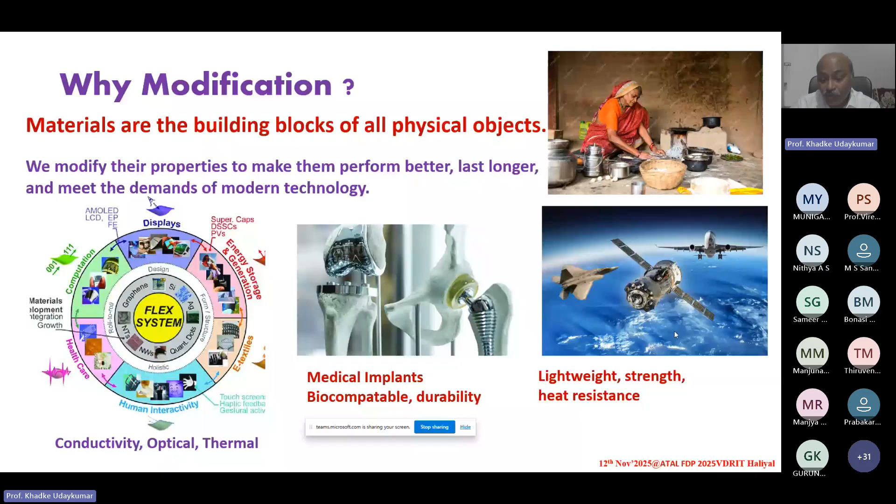So you need lightweight material, that modification is required. Modification in the sense, what kind of modification is to be done? One important aspect is, suppose if you are having a material in the form of bulk, you reduce that bulk material into nano size.

So one of the best modification ways is reducing the dimension of the material. There are different techniques to reduce the size of the material. One is considered the top-down approach, the other the bottom-up approach. Using these two techniques, you will be reducing the size of the material.

And believe it, when you reduce the size of the material, the properties are going to be changed drastically. One of the beautiful examples, let me tell you, by considering an example which has been called pizza paradox.

Let me narrate a story here. A king visited a hotel and asked the waiter to get one big size pizza. The waiter asked what size pizza he required. He simply said bring around a 12 centimeter pizza, that's a conventional number I'm just taking. The waiter went into the kitchen and saw there was no pizza of that size available. He came back to the king and said, 'Sir, I don't have the 12 centimeter pizza at present, it has been exhausted. If you want, I can give two 6 centimeter pizzas at the same rate.'

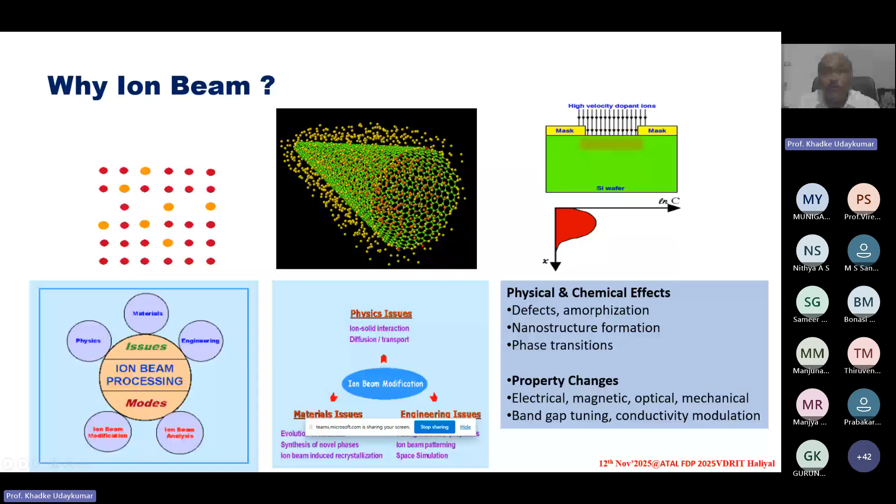Well, ion beam technology in the sense, as a part of physics, what we can understand - depending on the energy and the type of the ions, let me take down a very basic example here. You might be knowing the nuclear radiations, that is alpha particle, beta particle, and gamma particle.

Now, probably I can take a small gap in order to understand whether all the audience are attentive or not. Otherwise it becomes completely a one-way show - I'm just explaining it, whether the people are receiving it at the other end or not. Let me just check down. Receiving, sir. Receiving, sir. Good. Yes, sir, there are 52 participants, sir. Thank you, going on sir. Please sir.

Okay, yes. So now you know that when you are having a gamma particle, penetration power is very, very high. It can penetrate any thick material - it's a property of the material.

Now, the moment when you take down beta particles, to a certain extent it can also penetrate into the material, but the depth of penetration compared to the gamma will be very, very less. It is considered to be a charged particle. So because of the charged particle, there will be a hindrance in the material, and suddenly the beta particles will be stopped in the material. The range will not be that maximum as compared to the gamma particle.

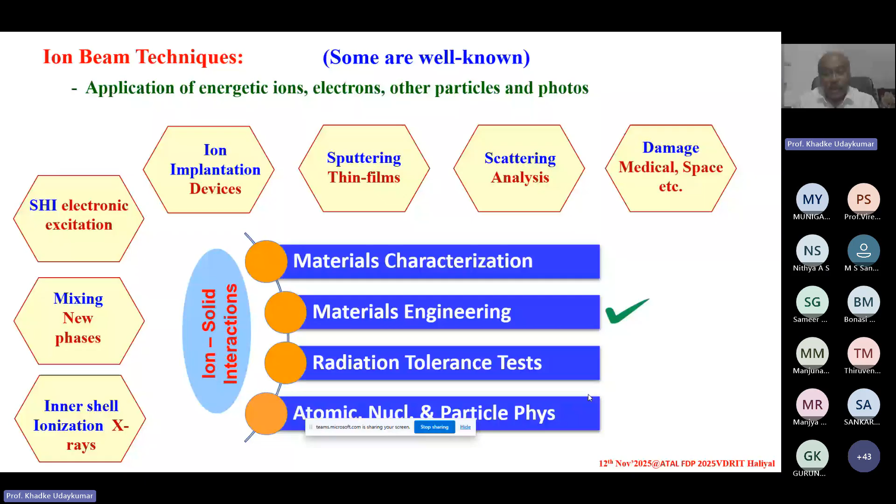Hope you all understood about the importance of ion beam. Well, what happens when an energetic ion hits a material? Obviously it loses energy. Who will take this energy?

As I mentioned, the moment an external ion hits the material or matter, it loses energy. Being a physics person, you should account for who has taken that energy - either it will be taken by the atomic nucleus, the whole atom, or it will be taken as electron energy. Who decides what share of the energy has to be taken?

Obviously, the cross-section area done by the ion when it hits the material. If the cross-section is more, more energy will be transferred. Atomic displacement will take place - direct damage. When atoms are displaced, direct damage takes place, or electronic excitation will take place, as I mentioned in the earlier slide. This slide tells us what kind of mechanism will be taking place.

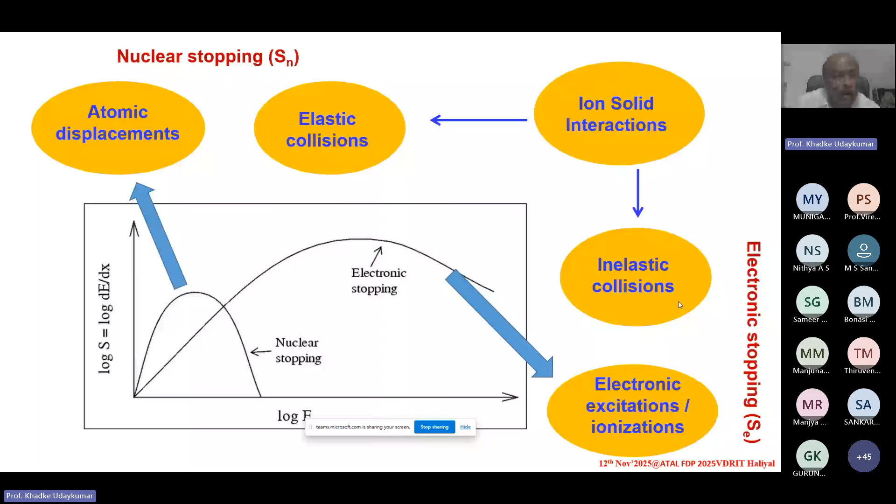Similar to X-rays - X-rays have a limitation because of their wavelength value, but this ion will have a smaller wavelength value. So more precisely, it tells about what type of atoms or what types of unit cells are arranged on the surface of the material. Or else, if the energy is more, it can go to the inner side.

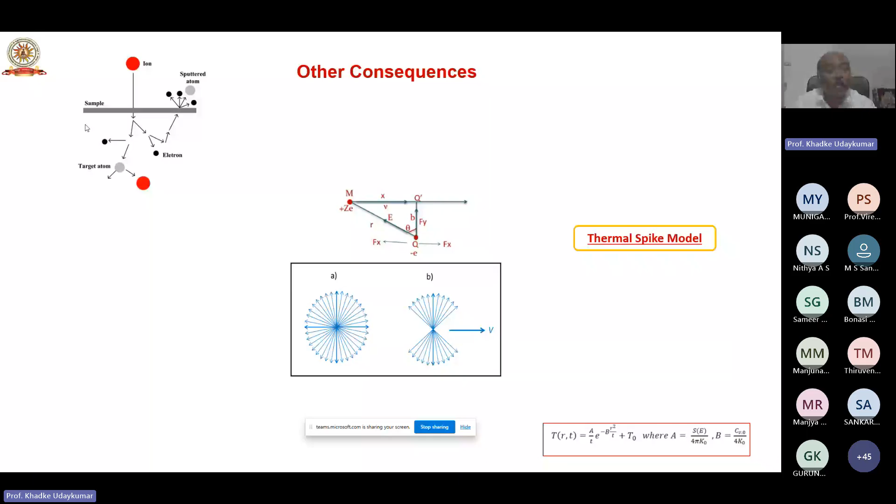So these electrons may interact with other electrons, creating secondary electrons called delta electrons. This kind of mechanism takes place inside the material, and this entire mechanism, in fact, we call it Coulombic explosion. The Coulombic explosion model tells us how ions, after penetrating inner depth apart from the surface, cause energy and structural modification inside the material, and that modification is what we call Coulombic explosion.

Other than that, as I mentioned, you will also be having delta electrons, which are most of the time considered secondary electrons. These secondary electrons, moving in their path, have a large number of collisions with lattice points and lose kinetic energy. When these larger kinetic energy secondary electrons move in the interstitial path, they have a chance of hitting the lattice points, and the lattice receives this energy. After receiving the energy, you must account for where it is going, and you will see that the material starts getting heated up.

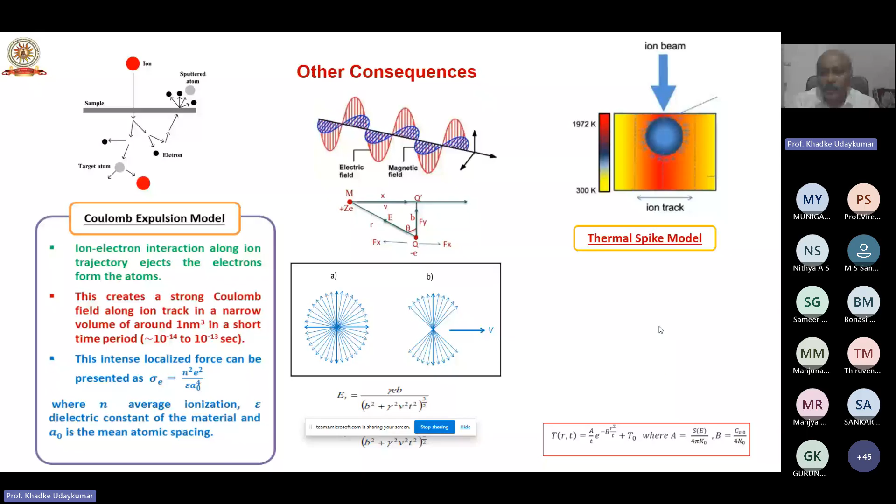These are purposely putting atoms or ions inside the material. When these ions are moving inside, there are no chances of having any external material getting deposited on it, like oxygen. All these experiments, in fact, have to be done in vacuum only, so you will not get any kind of oxygen deposited on the surface. Let me just skip this one in order to explain who has taken the energy.

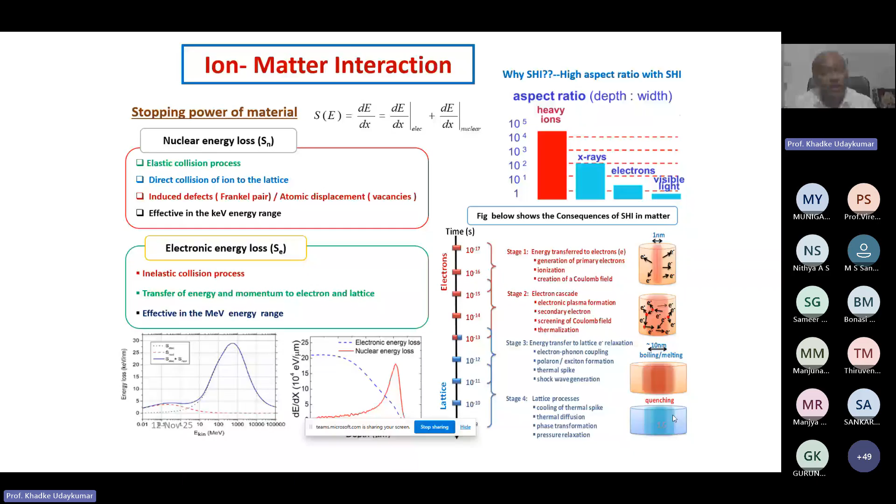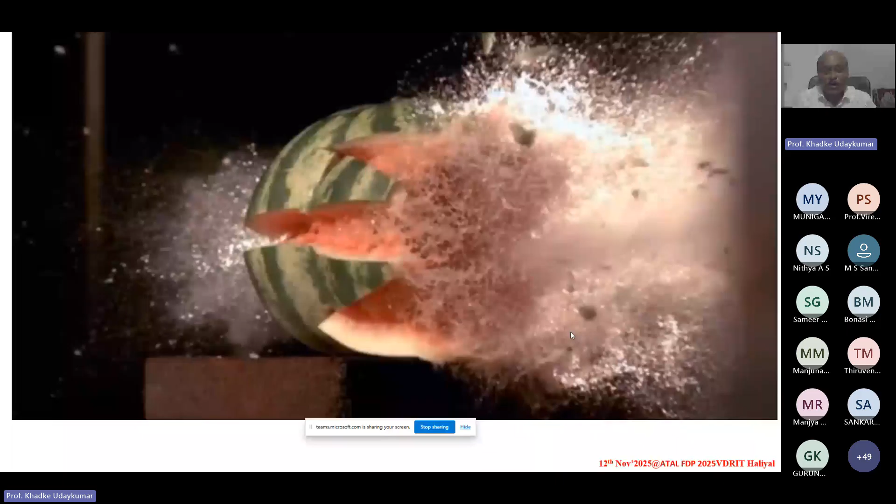Well, you can see, enjoy this. It was bombarded, and what kind of things happened? You can see that all the electrons from the inner side have come outside, whereas the surface of this watermelon remains intact. Somebody has rightly given the answer that it depends on the force, the impact, and what kind of collision takes place.

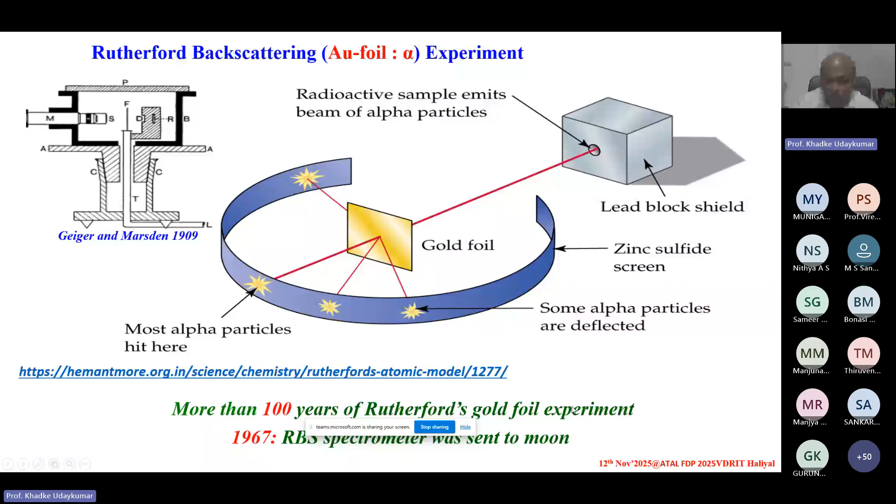So these are the classical diagrams and video clips I thought of sharing with you. Now, the Rutherford experiment — I don't think you need a complete explanation, which shows the discovery of the nucleus. We are now more than 100 years, close to 2067, closer to celebrating 100 years of this discovery. Well, these are the mechanisms by which you use ion beam in order to understand what type of material properties are there.

Well, let me explain this one. Now, having said this, there are many applications when I mention it—where do we get this ion? Now you have the freedom to use it.

Inter-University Accelerator Center uses a 15 unit double pelletron accelerator, where you can get huge amounts of energy depending on the type of ions used. If you use a proton beam, you can go up to a maximum of 50 MeV. If you use a gold beam, silicon beam, or any inert gas beam, you will get an energetic ion beam depending on that. Now, super LINAC, where energy can go up to giga electron volts, is also a facility developed at IUAC.

When you want very low energy, only for surface modification patterning, you can use the Institute of Physics, located at Bhubaneswar. That facility can be used where 3 megavolt tandem accelerator facilities are located.

Another option is IGCAR Kalpakkam. There you will have a 1.7 megavolt tandem accelerator, where you can get an ion beam, and according to the requirement, you can write a proposal. If the proposal is accepted by the scientific community, you will get a good chance to use that facility. IUAC accepts 5 types of beam time.

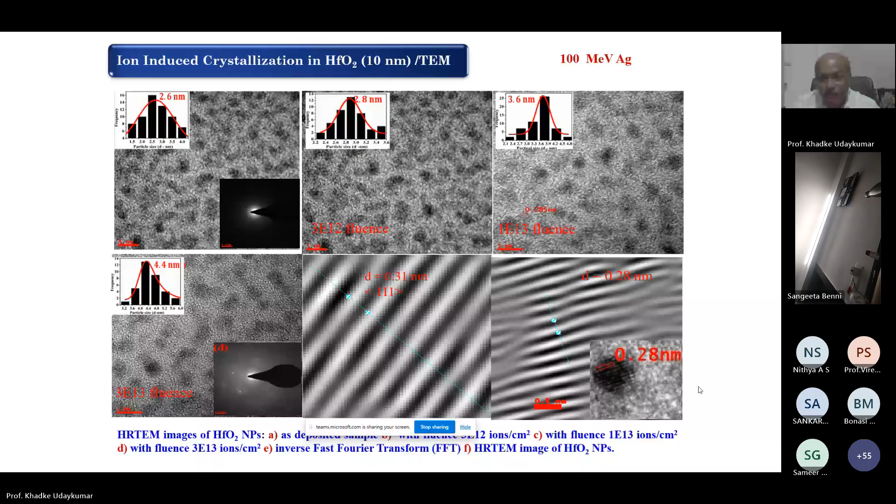Most of my work is modification of ferroelectric polymer using ion beam technology.

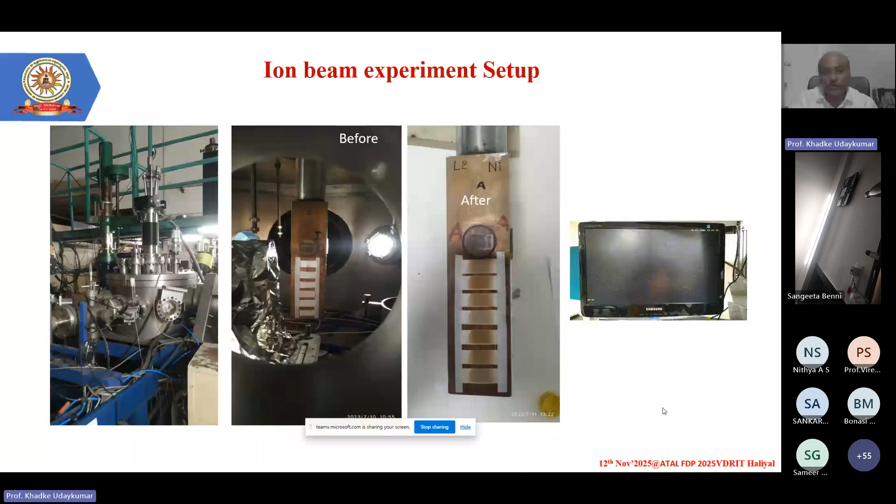Two important experimental proposals have been accepted by Inter-University Accelerator Center, where almost 3 PhD students have completed their work. One project is ion beam induced modification of ferroelectric polymer composites for EMI shielding, electromagnetic interference shielding.

Being a physics person, I know what the important mechanisms are required in order to have a proper shielding material. In a shielding material, electromagnetic waves, when hitting the surface, should either get reflected back, or the waves may penetrate to the inner side. The penetrated waves should get absorbed by the intermediate side. So what should be there so that absorption will take place? What should be there for reflection to happen?

Reflection will happen the moment the surface of this polymer is made up of essentially a conducting material. The absorption, or multiple reflection inside the material, leads again to a type of absorption only. So absorption is a phenomenon where two types of absorption will take place: direct absorption, or multiple reflection. For that, you need a material which has good dielectric constant.

As well as good magnetic property - in the sense, epsilon r and mu r should both be very, very high. Now, when you have a material whose dielectric constant is more, whose magnetic property is more, magnetic susceptibility is more, and conducting properties - suppose if you combine these properties in a single material, believe it, achieving shielding efficiency will be very, very excellent.

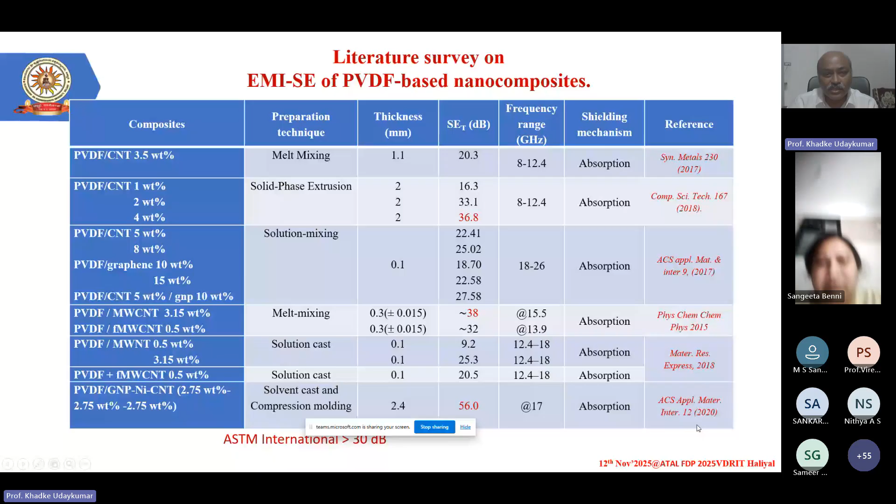I don't have to repeat the mechanism once again. When the fast ions pass through, it creates a thermal spike model which creates porosity in the material. The pore size is not equivalent throughout the medium - at the entry level, the pore size is smaller, and at the exit level, the pore size is larger, so it creates a cone-like shape. These cone-like shapes are very favorable for our experimental results.

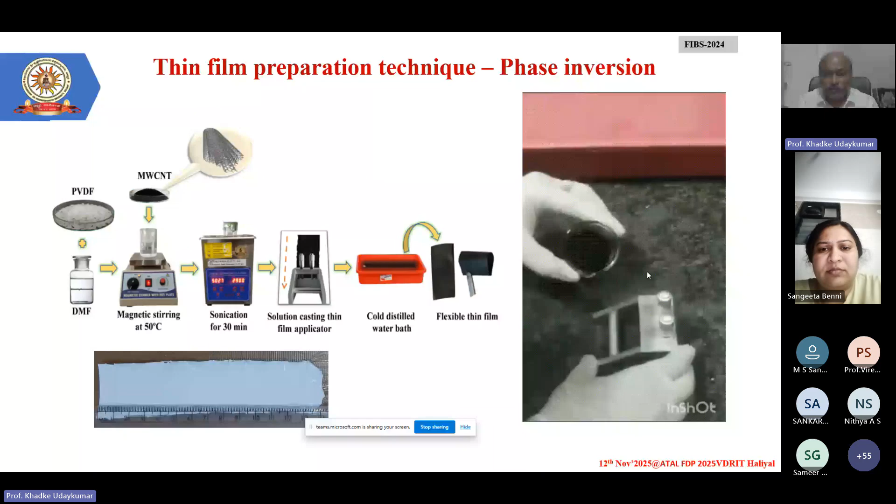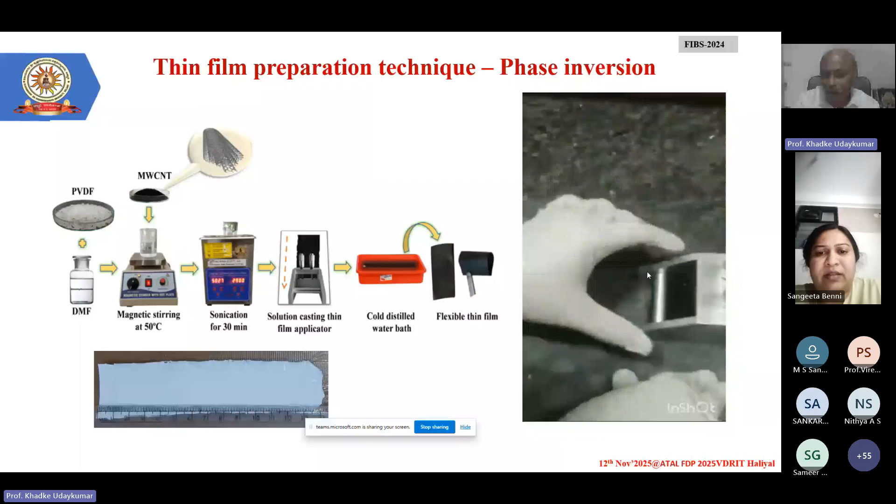Now, for the film, we have taken utmost care to have uniformity on the surface, and the density of the material is uniform. This is a technique developed in my lab - we are able to prepare thin films of the order of around 250 to 300 micron size, that too self-supporting. Some people say these are not thin films, these are thick films, but we can consider anything in terms of micron size as a thin film, and you can see how beautifully the films are coming out. Even the dimension, the area, is also very large.

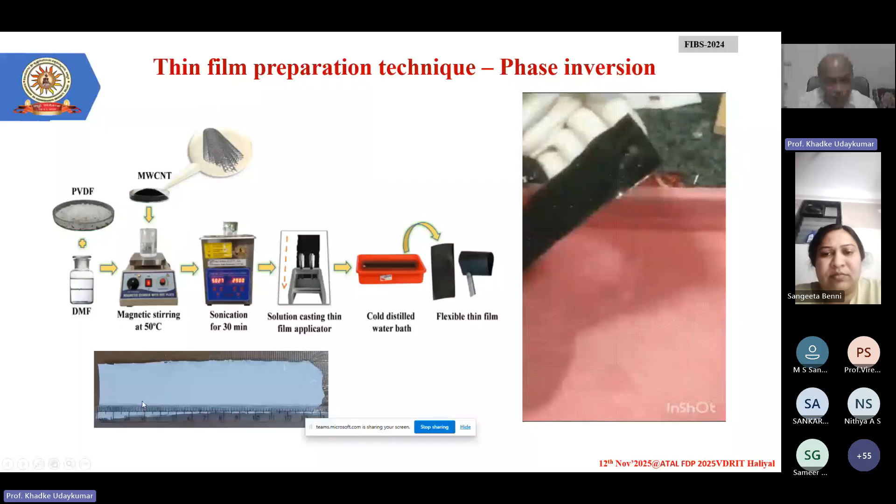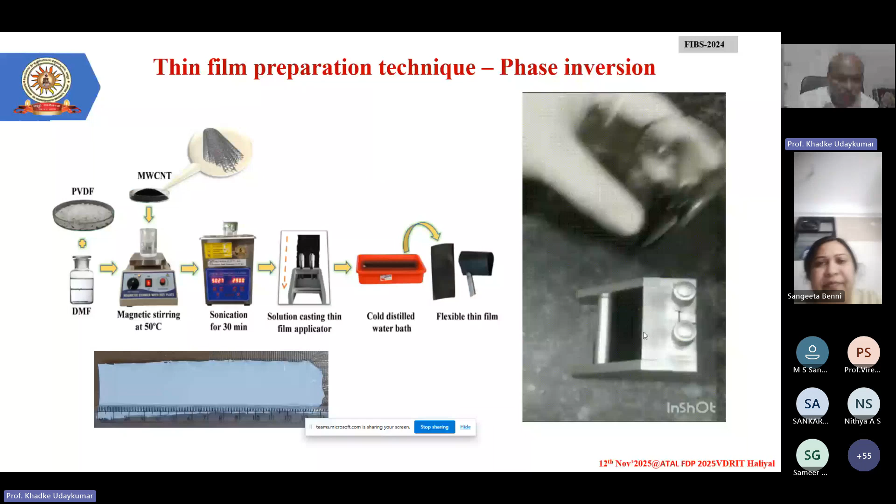So here in white color, this is pure PVDF. What you're seeing in this clip is the preparation of thin films of PVDF mixed with carbon nanotube - that's the reason the color is black, while white is the pure PVDF material. These are the films we used, and we treated them with ion beam. This is just to show that we have that facility.

These are the different types of beams we used: three beams total - 100 MeV oxygen beam, 80 MeV carbon beam. To get good conductivity in the PVDF material, we used the carbon beam. For good dielectric constant in the PVDF, we used the oxygen beam, and a nickel beam was used so we can tune the magnetic properties of the material - those things will be discussed here.

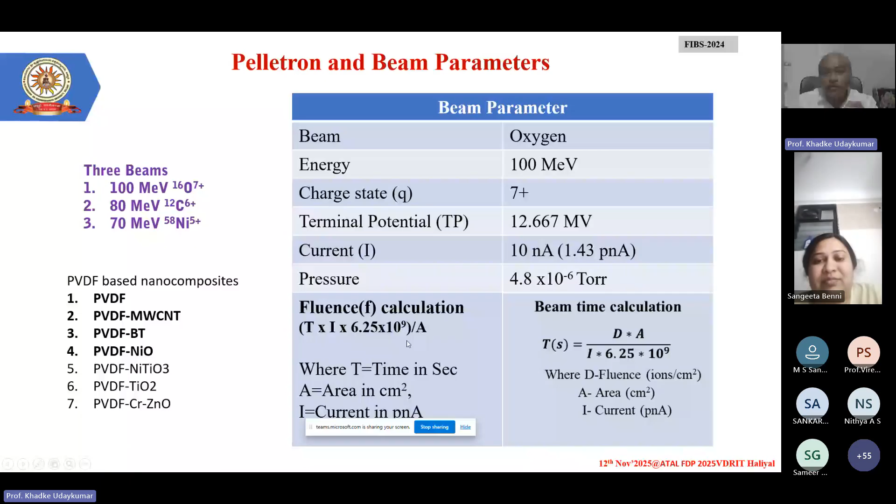Let me just put the values. What we observed is that the moment the beam hits the surface, suddenly bulging of the film takes place. Now what kind of bulging occurred - for pure PVDF, using 250 micron thickness, after bombardment with oxygen ion beam at a fluence of 10 to the power 11, it went from 250 to 310 micron. So almost a 20% increase in thickness has taken place.

Later it has settled. Continuously we are bombarding it with a different, higher fluence. Again it has decreased to 290 micron, and with further increase in fluence, it has settled back to 280, and later it has not changed. It has not come back to 250. This is just to show that after ion beam implantation, bulging of the film has taken place.

Now these are the microstructures. As I mentioned in the title, I'm explaining how the micro patterning and nano patterning has been done. Nano patterning I have already shown. Micro patterning is also called the columnar effect.

When the beam hits the surface and goes inward, it generates a surrounding temperature, and erosion takes place. Because of that erosion, you will see that a large number of porosities are created. This is the cross-section view of SEM which clearly shows how the micro patterning is created inside, meaning porosity has been created.

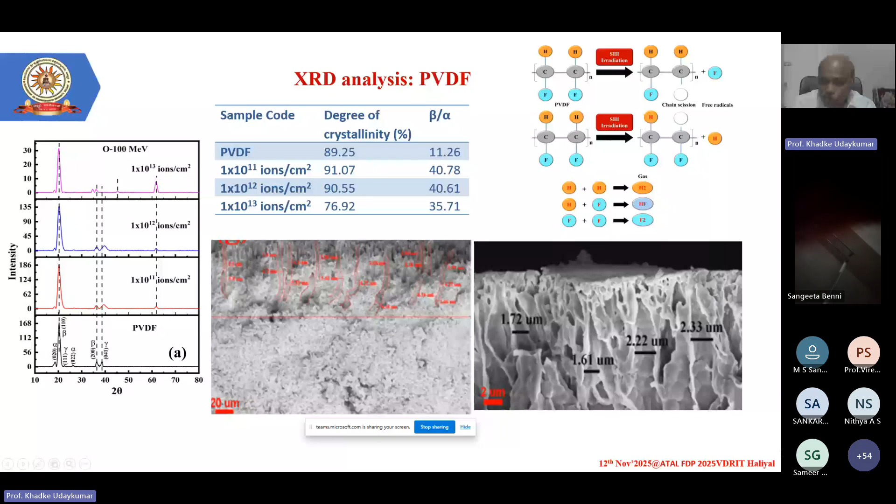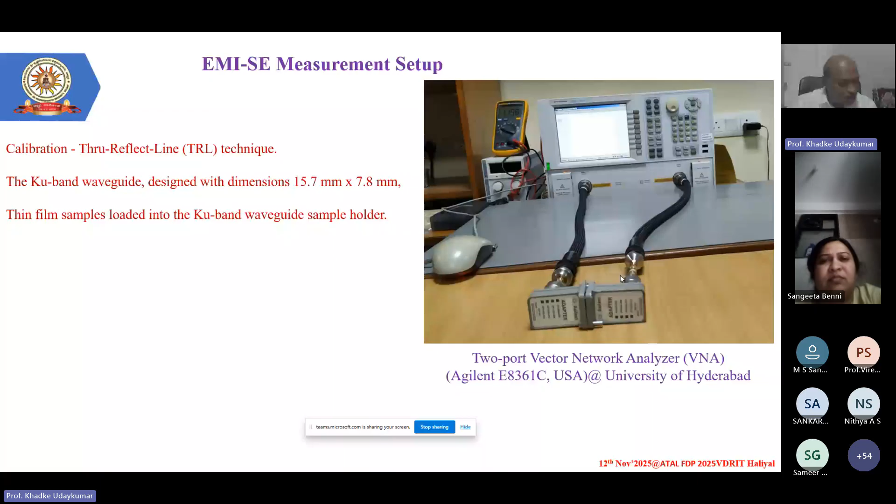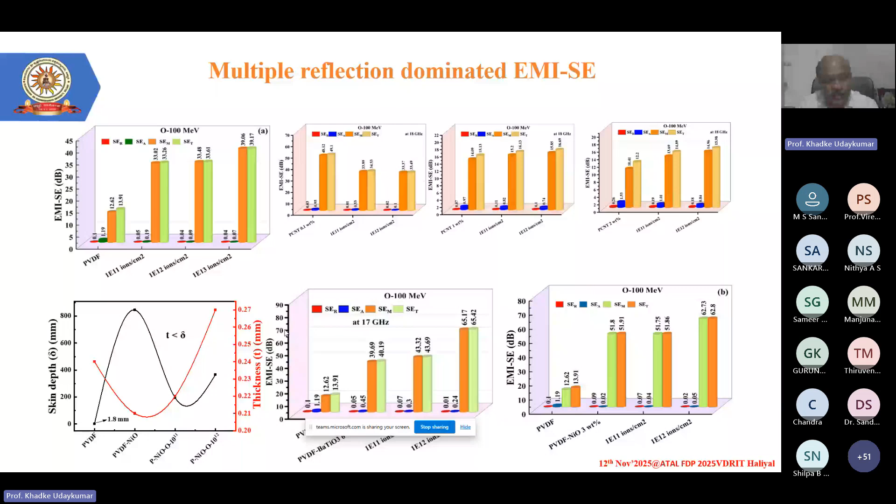Due to multiple reflection, the entire waves get deposited inside. We got the same thing, and that is the reason we reported the main mechanism is due to multiple internal reflection. That is what we have shown and published.

The second important application is about using the PVDF separator in a zinc air battery, and there also we could get results. Due to shortage of time, I cannot explain everything.

Porosity and all this mechanism are there, but let me directly go to the result.

Another important thing, I don't know whether it will work or not. A porosity is created. What is another conventional method to understand the porosity?

The electrolyte uptake is another important phenomenon to understand whether the separator is good or not. We saw that the electrolyte uptake is also coming in proper order.

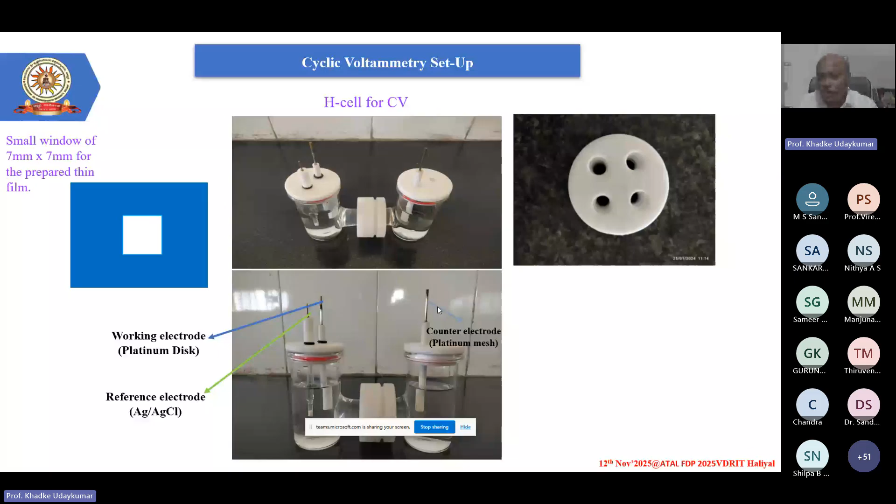These measurements have been done by us, and we used a very low cost experimental setup with very high precision value. That is an ExpEYES kit, which some people might know about, and using the ExpEYES kit, we developed our own CV setup. Even the cells, all those things have been prepared in my lab only.

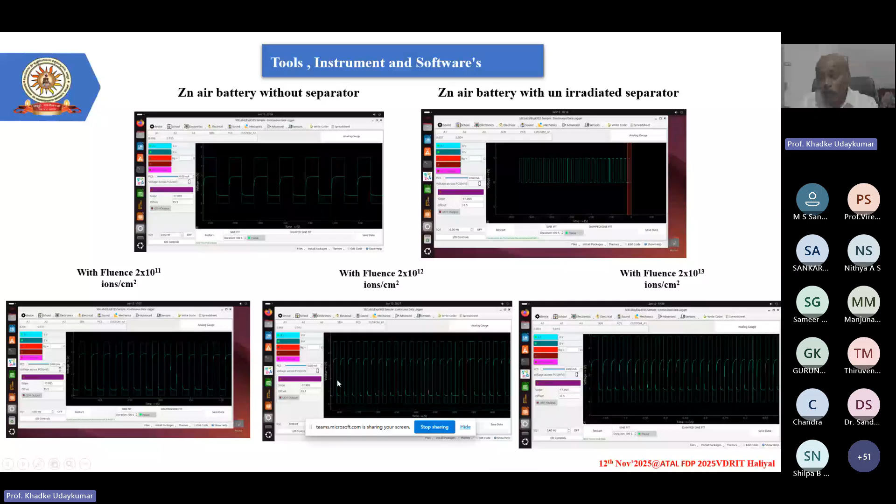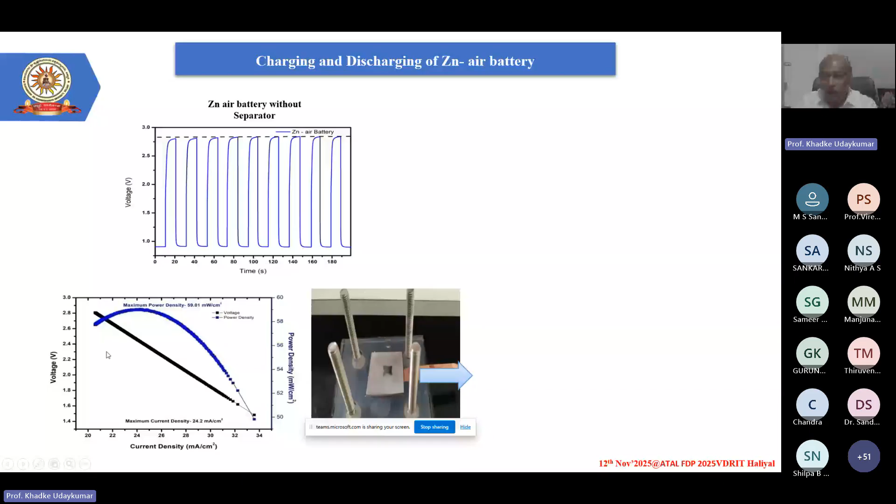Well, this is a zinc air battery without separator. You can see that without separator, you have power density as well as current density drawn in this graph. The moment when you put an unirradiated separator, there is no current flowing in it, and no kind of layer is prepared on the electrode.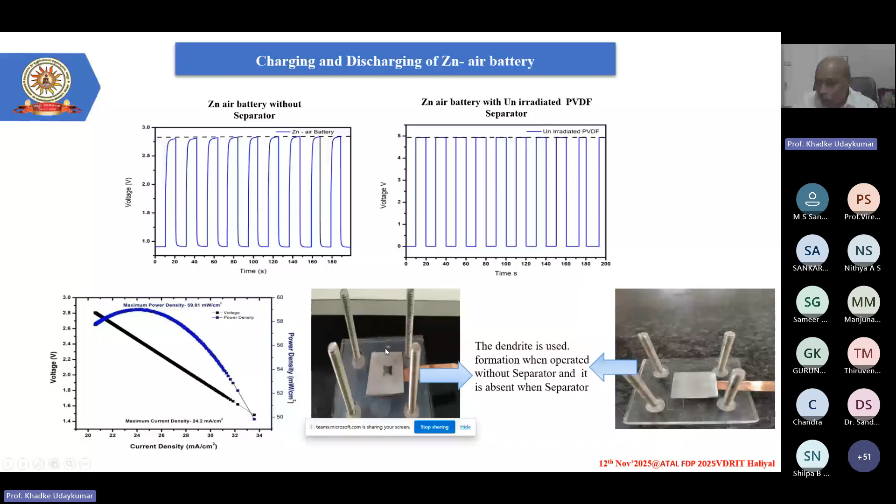This is an electrode, zinc electrode. Now you see that on this zinc electrode, a small kind of patch has been created when you're not using a separator. The moment when you use a separator, no kind of pattern has been created on the surface. It is completely neat, which means that dendrite has not formed.

So these show the variation of current density. A lot of work has been done by my student on how the current density varies across different cycles: first cycle, 50th cycle, 100th cycle, what is the current density and power density for the zinc air battery in each case. We saw that current density and power density drastically increased the moment irradiated PVDF was utilized. The maximum value we achieved is of the order of 59.91 milliwatts per centimeter square, power generated from our film.

And if you have cascaded, series-connected cells of this type, you will be able to generate a large amount of power from the battery and use it for a longer duration. These are GCD, galvanostatic charge-discharge mode measurements, where you can see the area is more, meaning more energy can be stored. That information can be understood from this one. Let us not go deeper into that.

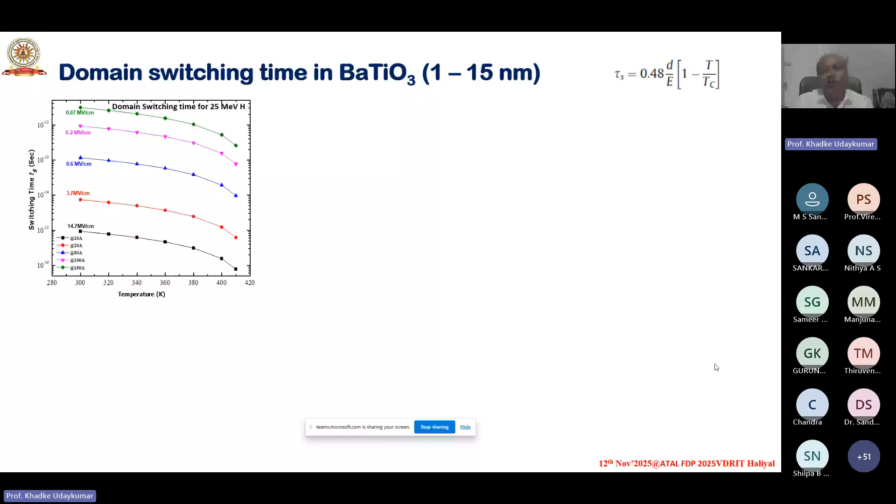Okay, all these are again another important experiment where we try to find out the electric field generated inside the material due to the passage of charged particles. So this is electrode-free domain rotation from the ion beam, where you can use these techniques in order to rewrite or retrieve electronic data from the material.

A lot of work that I don't want to explain at this moment of time, so I will skip this one.

Summary: the ion-matter interaction mechanism for modifying PVDF film is well understood till now, with energetic ion irradiation increasing crystallinity and creating controlled porosity as the new work we have put into the scientific community. This modified PVDF-based nanocomposite exhibits enhanced EMI SE, as we have shown.

We successfully demonstrated in a functional device that a zinc air battery with an irradiated PVDF separator showed excellent electrolyte uptake and increased power density. We did not purely take PVDF and study it; we made composites out of it and then irradiated or implanted it, so we could find out the synergetic effect of these two mechanisms leading to the higher properties we required.

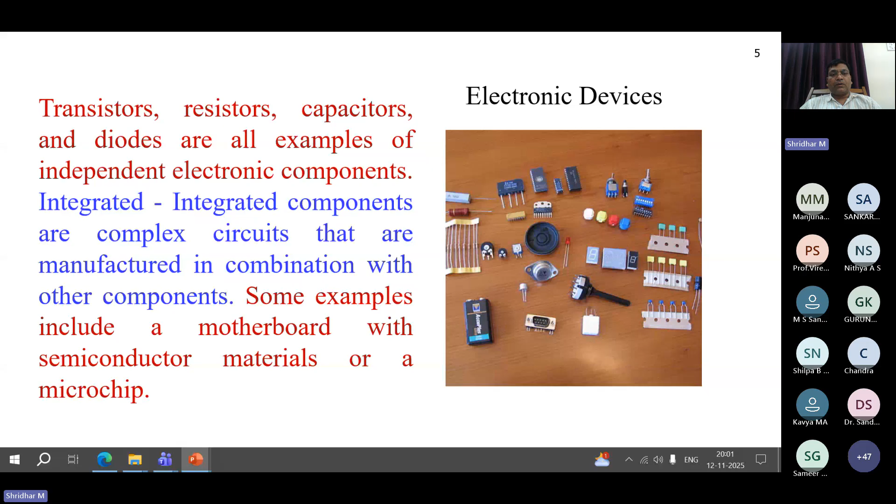Earlier days, we were having cathode ray tubes, which were bulky and not flexible at all. In recent days, as technology developed, we started having microprocessors and integrated circuits. Because of these improvements and enhancements in the electronic industry, we were able to condense the size of these electronic gadgets down to our fingertip. That is the advancement of electronic gadgets based on microchips or integrated circuits.

Anywhere in the world, only a few laboratories are preparing this type of etching, and one is actually in Taiwan. We have a Taiwan-based company that is manufacturing these electronic chips.

Earlier, our Prime Minister was also saying that fabrication of chips has to be done in India. During COVID time, mobile phones and laptops were costly. Why? Because the process was stopped. The Taiwan industry supplying these microchips was completely suffering from COVID, so they stopped the process. That is why we had a shortage of chips, and in India or the US we were not getting cell phones. The same cell phone selling for 10,000 rupees was selling at 15,000 rupees during those COVID days, only because of the shortage of these chips.

Now, the important part of this electronic device is not only the creation or etching of materials, we also need to protect it from dust. When we compare a simple 3 nanometer transistor with a simple dust particle, the dust particle becomes huge in front of that transistor. That is why you need to protect these silicon chips from dust, and how you are going to do that?

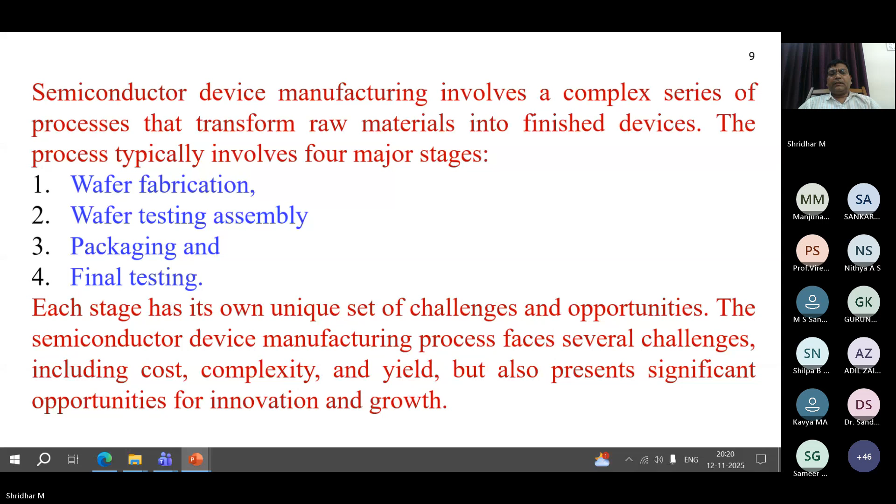Next, what are the fabrication techniques for creating micro and nano roughness, or for creating these electronic devices? There are so many advanced technologies, and I will slowly discuss the available ones. Lithography is one of the oldest technologies. In that we have photolithography, electron beam lithography, and X-ray lithography.

Photolithography is nothing but having an active material, then you expose it to UV radiation. Whatever pattern you put on during that exposure, the photoactive material will react with the UV, and a well will be created. Later you deposit a metal, and then you will have a device using this lithography - I worked on this lithography. Again, a minute error will ruin our devices here.

With lithography, you can go down to about 1 micron. Below that, if you want to go further, you need advanced instruments. Without advanced instruments, using just the rough instruments available in your laboratory, the maximum gap you can achieve is 50 micron on any substrate like silicon or silicon oxide.

Next, the method is soft lithography. Here we have replica molding. Replica molding is nothing but - I have a trillion transistors on one silicon wafer, I will copy it and paste it onto soft lithography, and then easily recreate that mold. So molding is a good technology here, but to create that mold we again need high-end instruments.

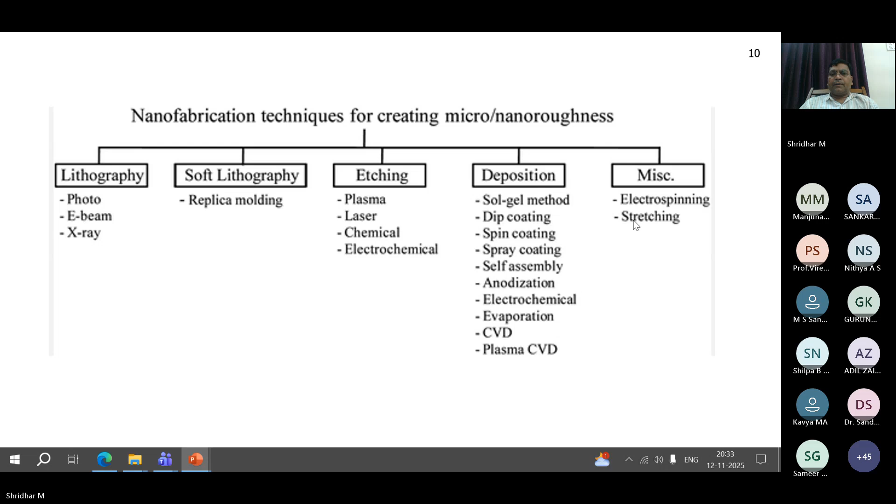Okay, sir, am I audible? Sir, you are very much audible, sir. Okay, thank you, sir. Yes, sir. Yes, sir, audible. Yes, yeah.

Now in material elaboration - till now I discussed the physics, electronic devices, and fabrication techniques. Now I will try to give more inputs on these materials. Choosing the material is also highly important here.

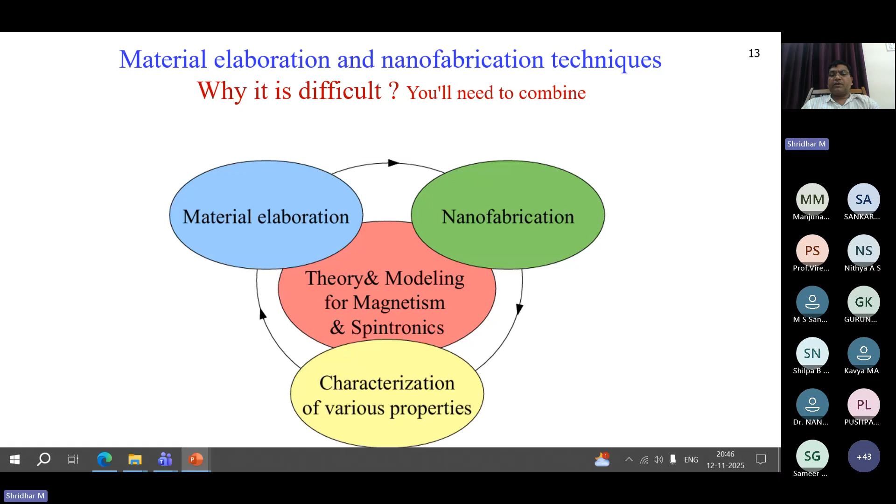And I already discussed theory and modeling are very much essential. Roughly, a trial and error method will not work at nanoscales or microscales. So you have to model using a few software tools. Then only can you choose the material, and then only can you have the exact desired electronic device in your hand at the end.

So now, why is it difficult, and what do we need to do if we want to learn? Material sciences will help us understand material elaboration - whether you want a silicon substrate or germanium substrate depends on you, and whether you are creating a thermistor or transistor is completely based on you. So for choosing material, material scientists will help you. For nanofabrication, we already know many technologies, so nanotechnology people will help you. And for measurement techniques - if you already have devices, you need to know which characterization will help you understand your device. These measurement techniques will help you understand whatever sensor or electronic device you created after the theory and modeling.

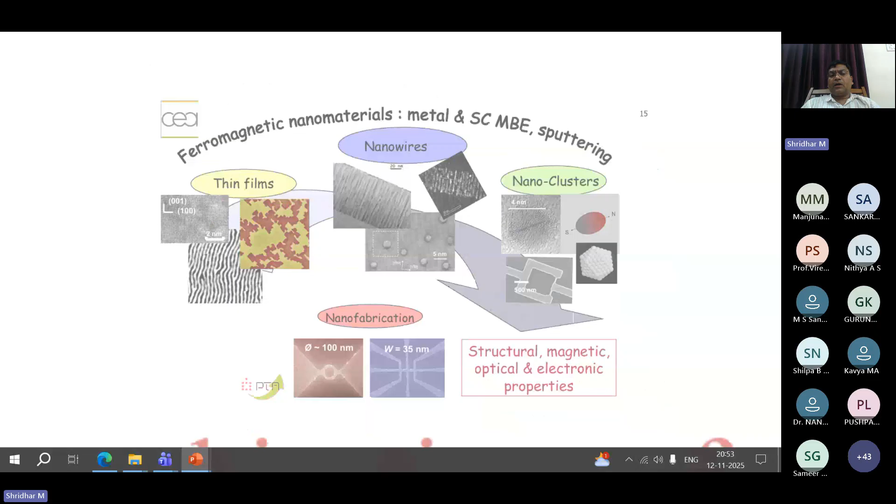Next, the outline. Now slowly I'm switching it to these chemical vapor deposition, molecular beam epitaxy, and ALDs. So the outline of the coming presentation is material growth and fabrication, some metrological tools, some examples of combination of top-down and bottom-up fabrications.

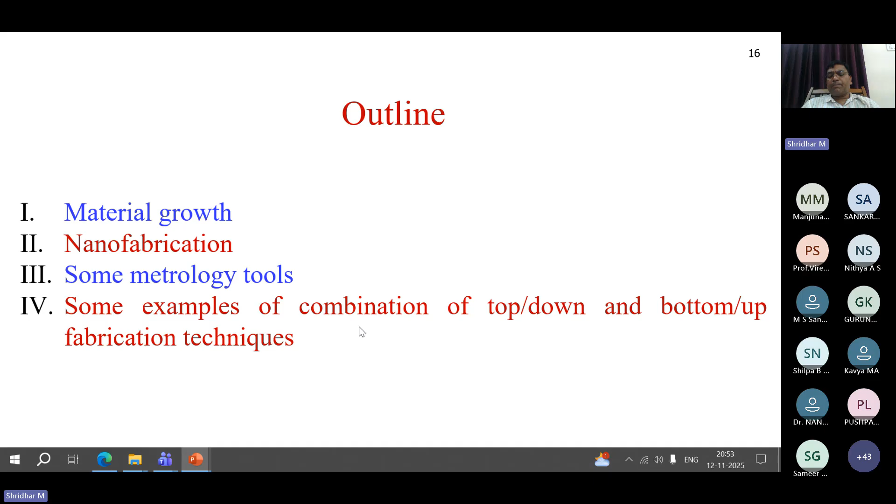Part one, I will discuss material elaboration, actually the thin films and novel materials. We use different types of alloys, the combination of two or more metals or semiconductors - we call it alloys heterostructures. Heterostructures is nothing but layer by layer structures deposited by physical or chemical methods, like physical deposition or chemical vapor deposition.

Again, based on the requirement, people are choosing the deposition methods. We can use these deposition methods to deposit dopants as well as metals. Metals to create current collectors, and dopants can help us create these junctions, p-type and n-type. Once we have these junctions, then only we will be having transistors.

Material evaporation or sputtering: molecular beam epitaxy, sputtering deposition, ultra high vacuum evaporation chambers. For material evaporation or sputtering, we need molecular beam epitaxy or electron beam sputtering. For ultra high vacuum chamber, we need pulse laser deposition. Also, we can do this using sputtering.

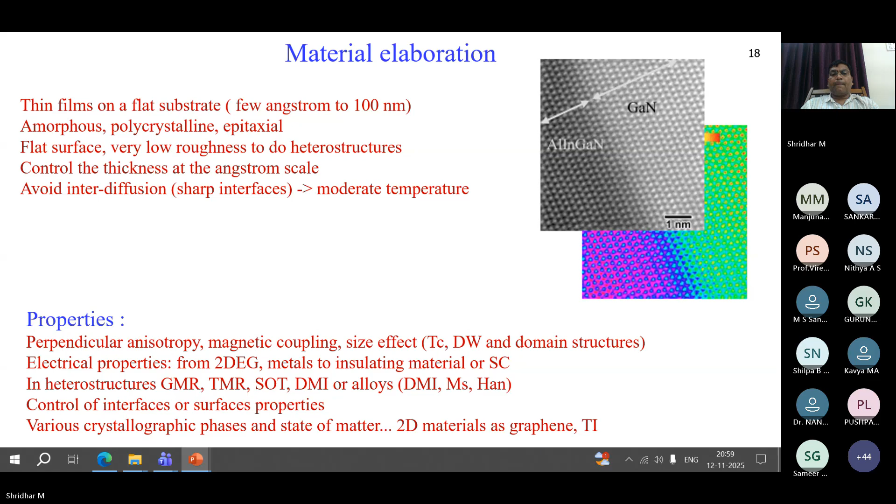Now I'm switching to physical vapor deposition.

Sir, how many minutes do I have now? Hello. Sir, how many minutes do I have? Sir, you have 10 minutes to go, sir.

Okay, then I will quickly finish these things. Now, particularly, I'm concentrating on physical vapor deposition. The task assigned to me was to only concentrate on these methods: molecular beam epitaxy, chemical vapor deposition, and atomic layer deposition. I have 10 minutes, so I will not waste my time.

So, physical vapor deposition, I will schematically explain. Here I'm supplying the voltage, and here is the filament. The filament will heat the material. This is happening in a controlled atmosphere, assume in argon atmosphere. I have aluminum or SNS flakes or whatever.

Knudsen cells is again a different type of method to deposit metals on your substrate. Usually these evaporations take place at higher temperature, higher voltages, and lower pressures. You can see vacuum of 10 raised to minus 5 Pascal, and ultra high vacuum is nothing but 10 raised to minus 8 Pascal. Attaining this 10 raised to minus 8 is engineeringly very difficult.

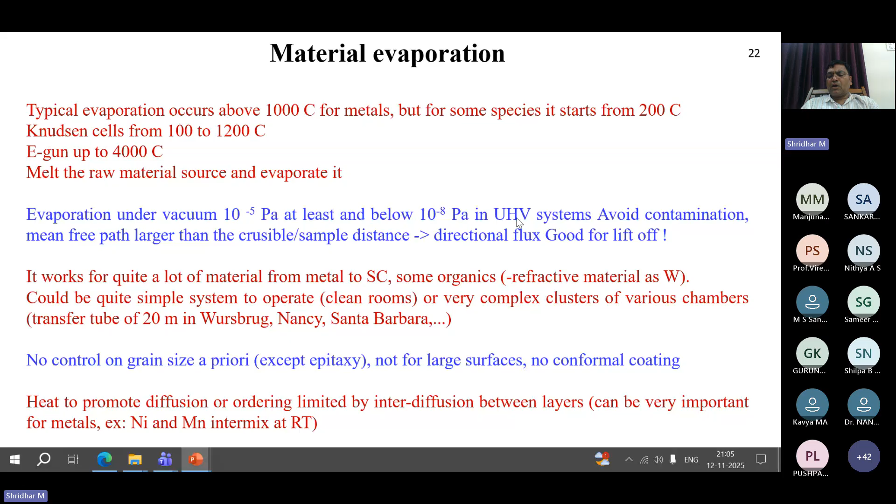You need to control the atmosphere, control the instrument, clean it every time. So sometimes attaining 10 raised to minus 3 is also very difficult in India, and people are talking of 10 raised to minus 8 ultra high vacuum. To create this ultra high vacuum, we have specifically designed pumps.

One is the rotary pump, which will take us to 1 Pascal, and turbo pumps will help us reach 10 raised to minus 5. Cryogenic pumps or ionic pumps will help me go to 10 raised to minus 6 or 10 raised to minus 8. This is the turbo engine.

This is used to suck the entire gas which is present in the active material. This type of pump is used, and these turbo pumps cost somewhere around 3 lakhs, and cryogenic pumps, whenever you go for cryogenic, it crosses 50 lakhs.

Based on the requirements, cryo and ion pumps are used in very limited institutions like Indian Institute of Sciences or Indian Institute of Technologies. Up to rotary and turbo, we can have it in our universities in Karnataka, just to have 10 to minus 5 Pascal. So growth, I will not go in detail of these things.

I have not come to molecular beam epitaxy yet, but let me explain what happens when we heat the material. The atoms or electrons gain energy and start moving, taking other atoms along, forming islands. What causes these islands to form is the energy of the material being deposited, which is in vapor form.

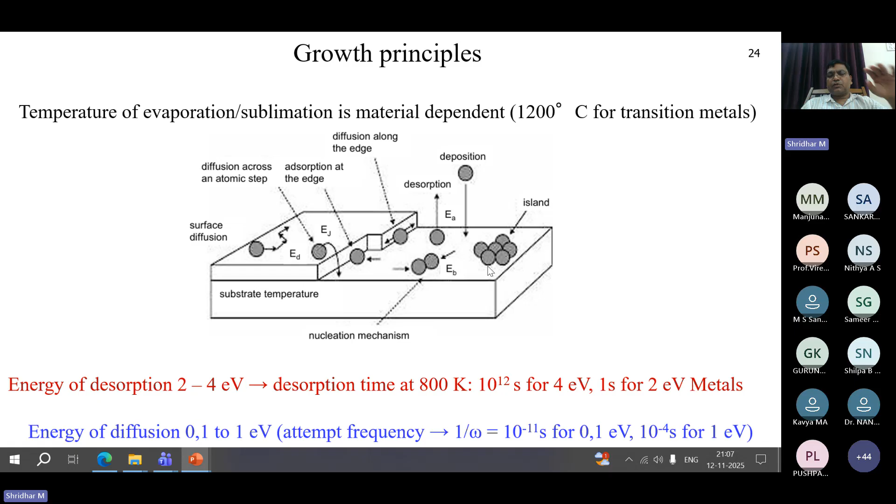First the first layer will form, let me show you here. So one layer is formed. As I'm depositing, the gold atoms are coming, and even if an atom falls elsewhere, because of this temperature it gets pulled in, and it forms a thin, single layer of gold.

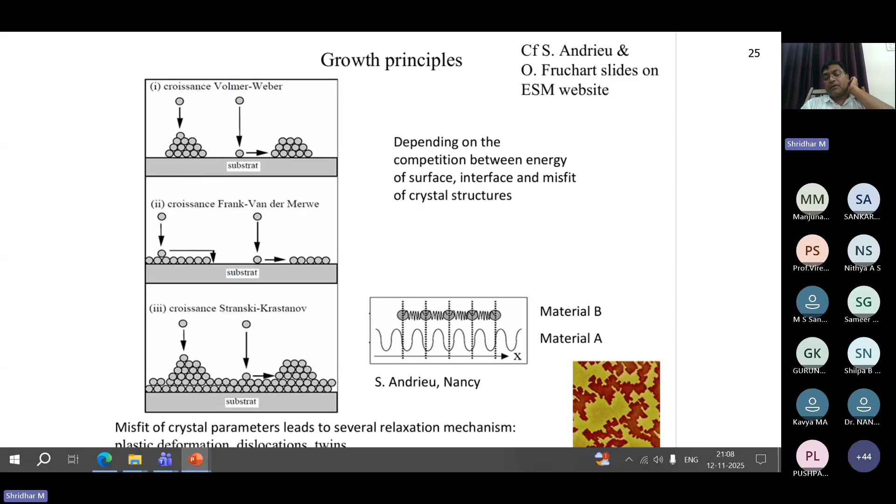If you want a second layer, the evaporation rate should be increased, which is why control is very important in these fabrication methods. People today are studying single-layer and bi-layer active materials, as well as tri-layer or multi-layer structures. For graphene, the arrangement of carbon atoms in one layer is single layer, and multi-layer graphene is also used depending on the application.

Now, molecular beam epitaxy is also a complex system where you need reflection high energy electron diffraction, scanning tunneling microscope, Auger, and XPS. The deposition rate is 0.1 angstrom per second, and the vacuum required is 10 to the minus 9 Pascal.

This setup uses an ion pump, a nitrogen trap, and even an oven at 1000 degrees Celsius. It is basic research equipment for materials, allowing multiple possibilities: co-deposition, in situ annealing, controlled by RHEED, with 1 to 2 depositions per day, including surface preparation, analysis, and sample introduction.

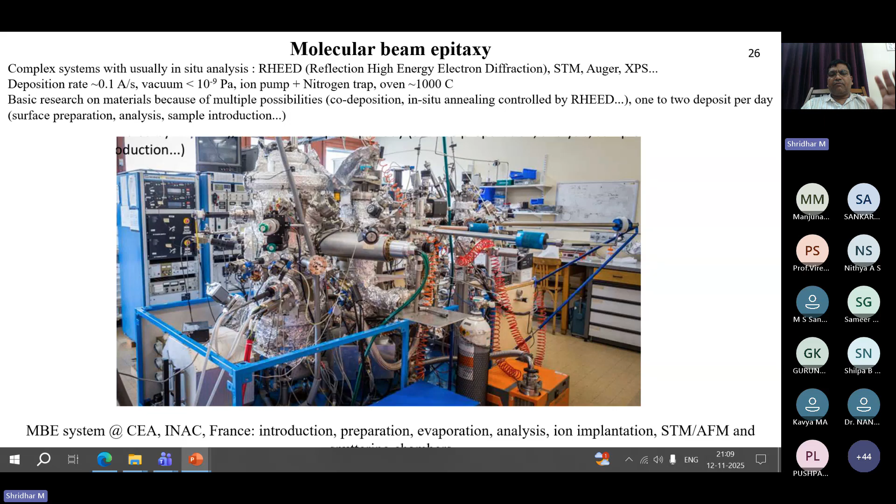This is the molecular beam epitaxy instrument available at CEA INAC, France. It looks very easy, but if one thing goes wrong, like the sensor or pressure gauge, the entire instrument has to be dismantled and rearranged again. So this is done every time you run a new active material deposition.

In this area, this is the molecular beam epitaxy setup, this is the power supply, and this is the evaporation chamber. Suppose we want to deposit gold on silicon, so here you keep the gold, and this is the e-gun, the electron gun, which helps melt the gold in the evaporation chamber. And this is the electron diffraction, high-end reflection beam introduction chamber.

Whenever you want gold, you can open the gate, and whenever you don't want to deposit gold, you can easily close the gate. The ion pump I mentioned helps achieve 10 to the minus 9 Pascal, and the turbo pump helps achieve 10 to the minus 5 Pascal.

I think one IISc professor has this molecular beam epitaxy setup, but currently I don't think it is in working condition.

Next is sputtering deposition, which is also a type of deposition. A fellow who came from the US after completing his PhD opened a company called Hind Hivac in Dabaspet, Bangalore, and started manufacturing these sputtering machines. He sells them at a very low cost, around 17 lakhs, whereas foreign instruments cost around crores. He understood what was needed for these depositions.

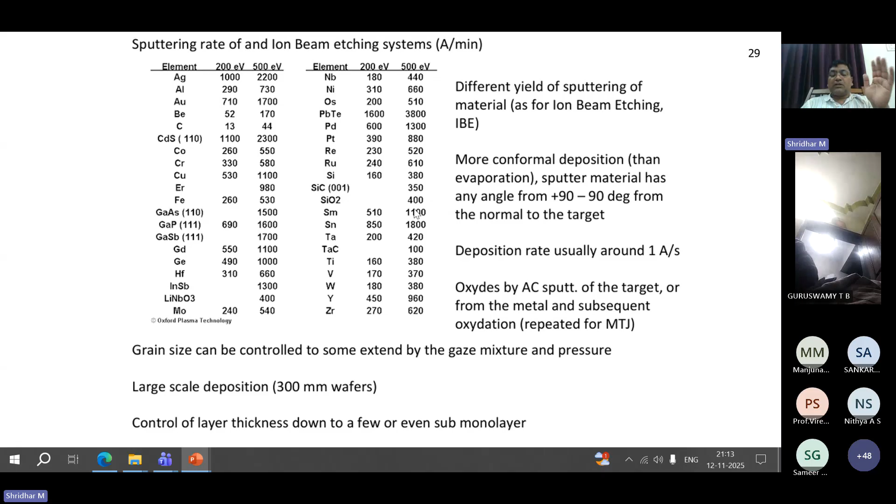This is the heterostructure I just mentioned. These are heterostructures where layer by layer you deposit material. Assume this is tantalum and this is platinum of 20 nanometer thickness. If this thickness is increased to 21 nanometer, the entire device property is going to change. So controlled deposition and controlled nanofabrication technique is highly important in semiconductor fabrication.

I already told you they deposit these as dopants. You can see platinum, boron, magnesium, cobalt, iron, ruthenium. All these materials are used to create a magnetic tunnel junction with active material. This is the tunnel barrier, magnesium oxide.

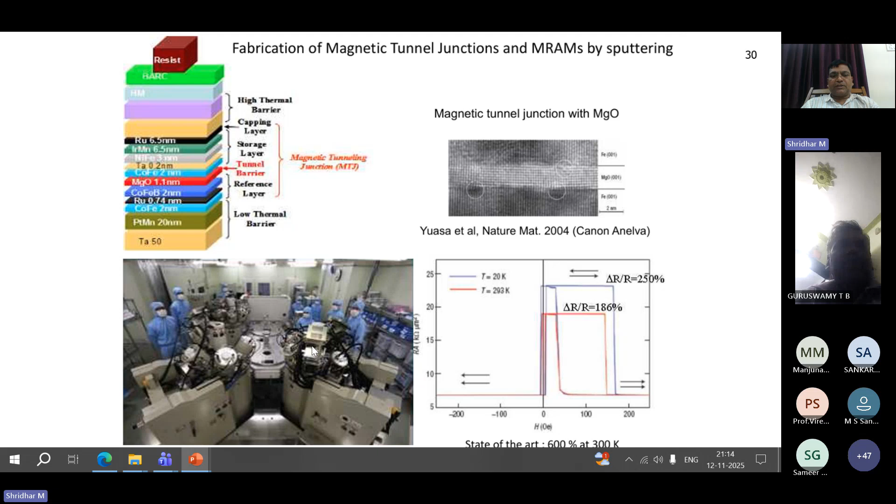This appeared in Canon Anelva, and this is what the ion beam laboratory looks like. This is in France, Japan it was. Pulsed laser deposition, PLD, the instrument looks like this.

Instead of an electron beam, I'm using a laser beam to evaporate this active material. Once the material evaporates, it comes and sits on the substrate, giving controlled, uniform size dots. These dots are platinum dots of size 50 micrometer. This is pulsed laser deposition.

Now chemical vapor deposition. This is the instrument, chemical vapor deposition. The size is room size, and there are many different types: low pressure, metal oxide, plasma enhanced, using materials like silicon, gallium nitride, or InSb from groups 3 and 5 of the periodic table. It offers lower vacuum, higher deposition rates, and very good quality. Chemical vapor deposition gives the best deposition, which is why it is more useful in industry.

Species introduced in the chamber decompose and react on the substrate. Assume I want to deposit graphene growth on copper - here this is graphene deposited on copper. What they do is give high energy so plasma is created, the carbon active material evaporates and deposits on whatever substrate is used. Here they considered copper, but we can also consider a PET sheet, silicon chip, or germanium substrate. It's based on the requirement.

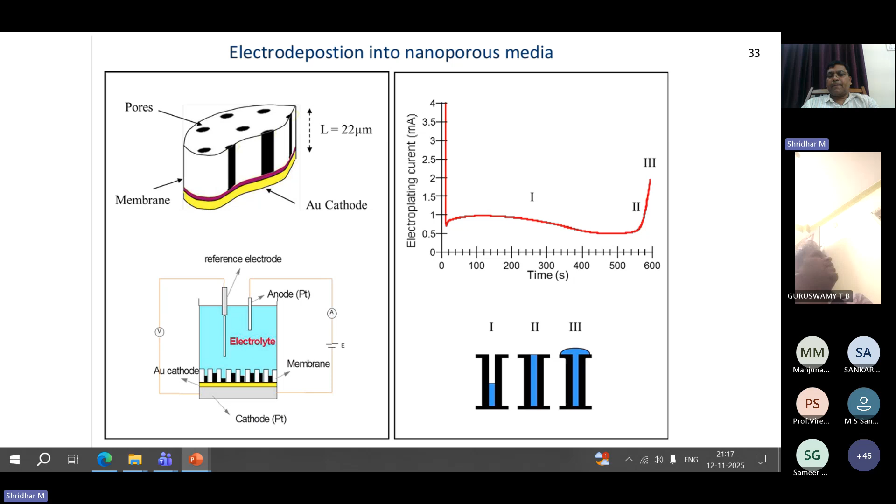Atomic layer deposition - you can see high K materials and also metal barriers. These materials evaporate and come and sit, then another material comes and sits, forming Al2O3 on the substrate. This is atomic layer deposition. Here you can see electrodeposition into nanoporous media. People create these nanopores to have a high specific area, which will enhance the energy density, capacity, or high sensing rate when creating a sensor out of these materials.

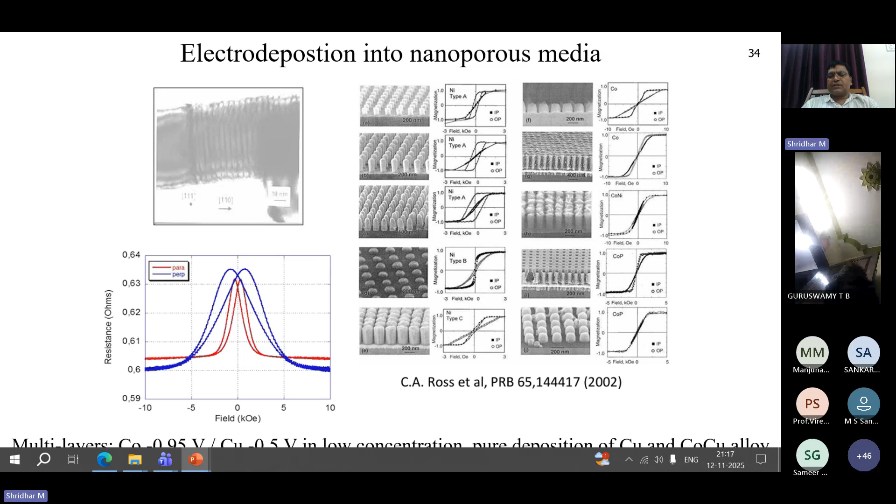Okay, these types of porous structures or nanorods can be created using electrodeposition. I already discussed this, so I don't want to go into detail, though I still have many slides.

Nanofabrication, we already discussed top-down and bottom-up. Top-down means we are going from the top and taking out the material that is already there. If I dig into that, it's top-down. Bottom-up means you have precursors, and then you create a bulk material from them - that's the bottom-up approach.

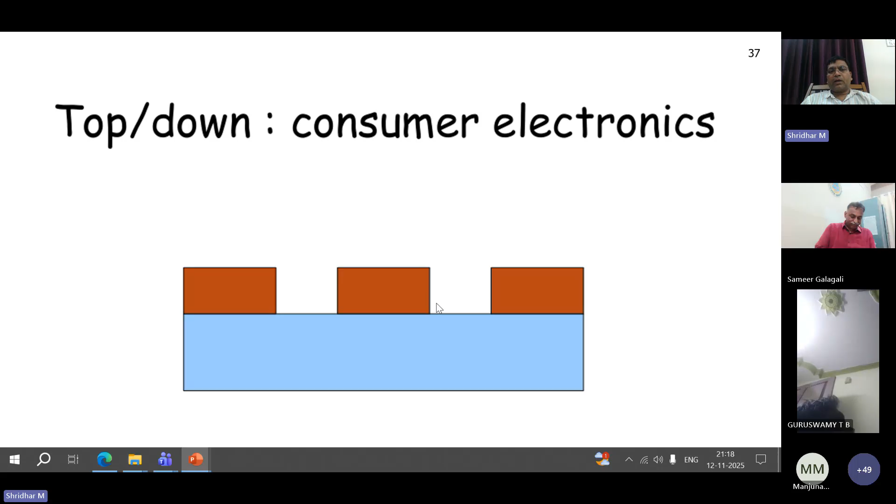Here in top-down, I eliminated and created a well on any substrate. So it is based on the requirement which approach people use.

Okay, I will not go into detail.

This is not RAM, but a system agent memory. But in phones and such, we have a memory chip on one side and a storage chip on another side - these are completely separated. Nowadays in your cell phone, people say 4+4 GB RAM. Why? Because whenever you need extra RAM, this particular area is also contributing to random access memory.

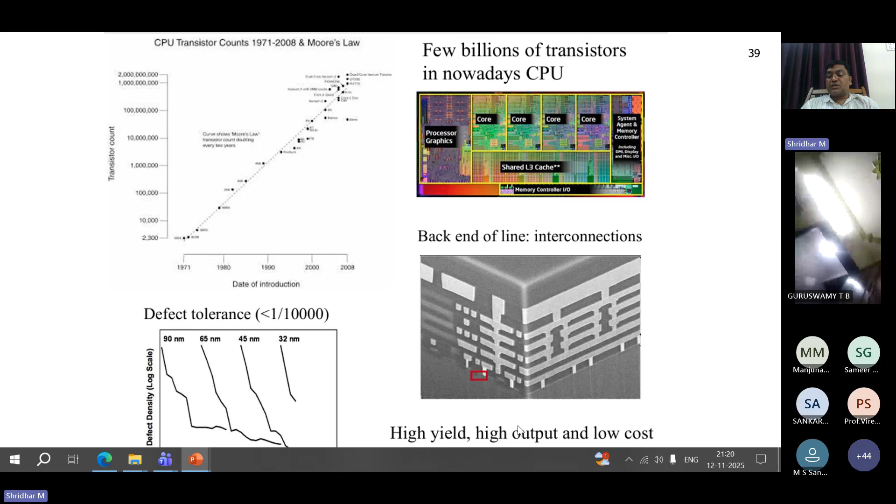And the dimension also, you can see here, is 32 nanometers - highly precise, high yield, high output and low cost. Very good devices.

And clean room technology is very much essential to have... for this, one minute.

Clean room technology is very much essential to fabricate these devices because this is all controlled - one dust molecule in front of a 1 nanometer transistor is very huge. So for that, you need to have high-end clean rooms.

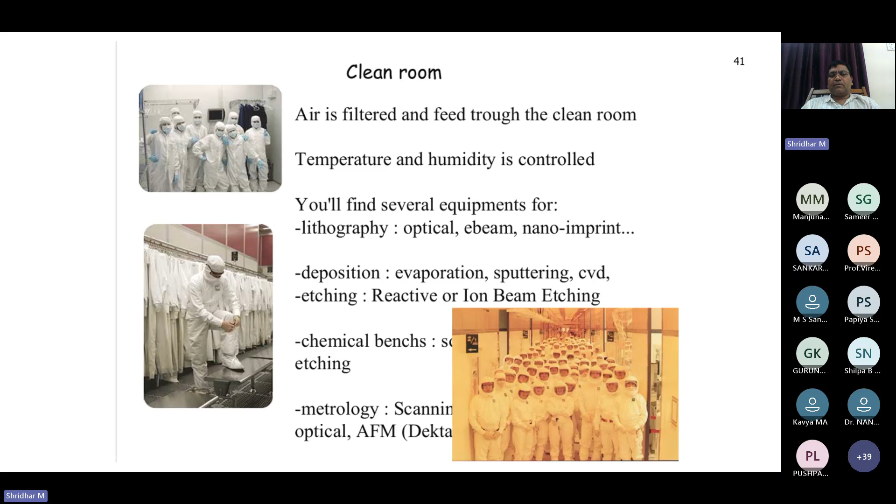In Karnataka, I think two or three academic research laboratories have clean rooms. Industrially, Samsung and Tejas Networks, a few companies have them in their R&D. Clean rooms are a must - without a clean room, you cannot create these devices.

Molecular beam epitaxy - now I came to the main topic, molecular beam epitaxy. Here we are using an electron gun for the evaporation. So everywhere the concept is the same.

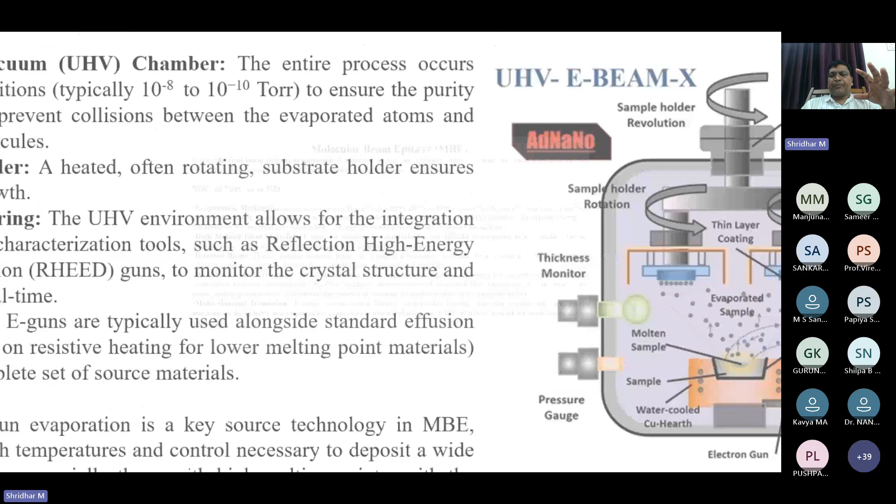I will be having the active material - active material is this one. Here you can see this is the gold, and here is the electron gun. The electron beam will come and hit this gold or platinum, and it will evaporate. And this is the substrate, which is rotating, so that uniform formation of films is possible. This is molecular beam epitaxy.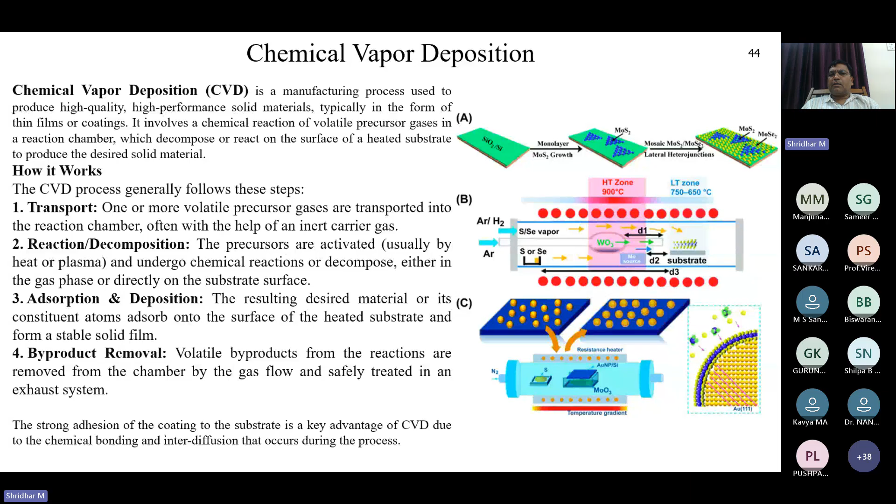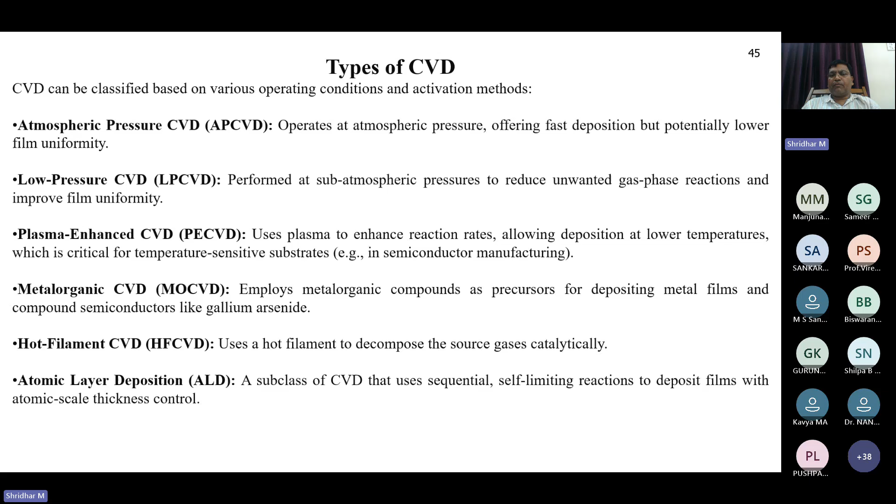Not only can you deposit MoS2, you can deposit other compositions like gallium nitride, or indium selenide InSe or InSb, based on like LEDs manufactured using MBE or CVD. This is also done in a controlled atmosphere. You can see atmospheric pressure, plasma enhanced metal organic frameworks, and everything, metal organic frameworks also can be deposited on that. Key applications of CVD, semiconductor manufacturing, this is essential.

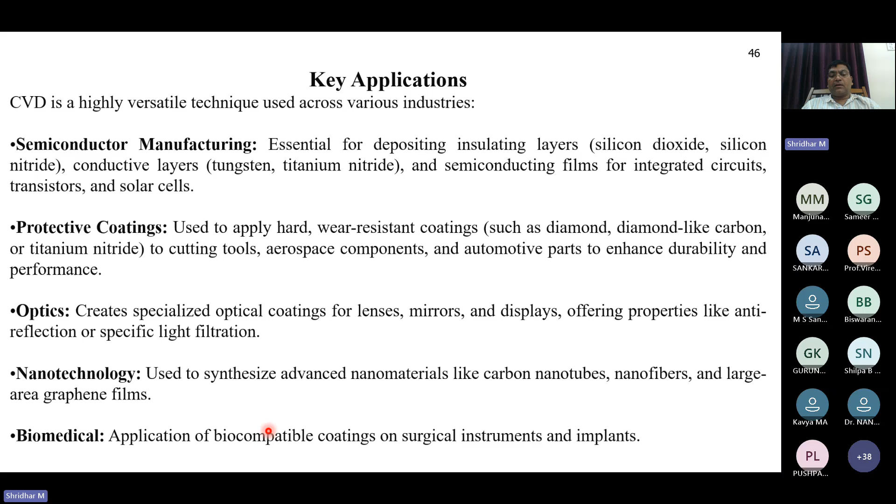And mirrors, displays offering properties like anti-reflection, anti-glare, specific light filtration. Nanotechnology, it is used to synthesize nanomaterials, carbon nanotubes, nanofibers, and large area graphene films. Biomedical, it is used in coatings on surgical instruments or implants.

Now, atomic layer deposition, as I already discussed, is again a sophisticated instrument which I saw and worked on, this ALD for MoS2 deposition, at Indian JNCASR. There, Professor CNR Rao had this instrument, which is very old, like 10 years old. Now recent advanced instruments are available, but right now we don't have that technology in India. But whatever we had, we used it to create

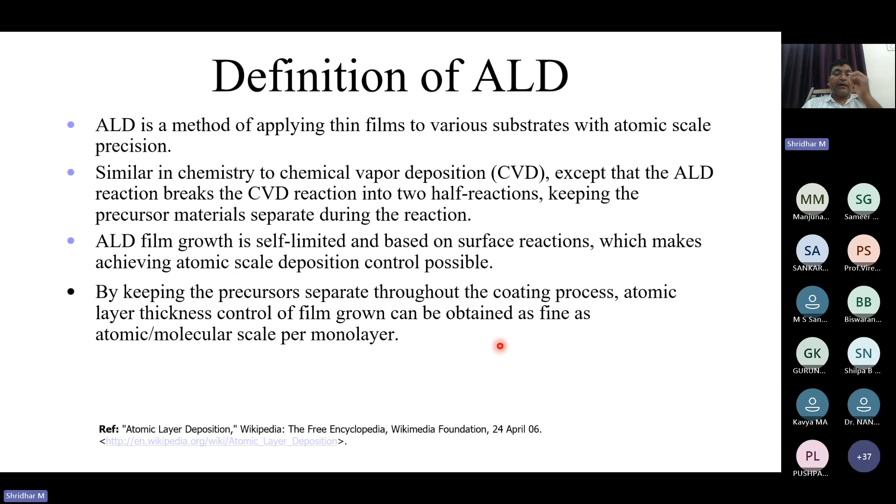ALD cycle for Al2O3, based on the application, the ALD process and technique. Here aluminum oxide is deposited on the substrate, example silicon. You can see here these are the precursors, trimethyl aluminum, and methyl group and hydroxyl group. What happens next, they react and come and sit on this silicon oxide, which is actually Si and O2. So oxygen will be there.

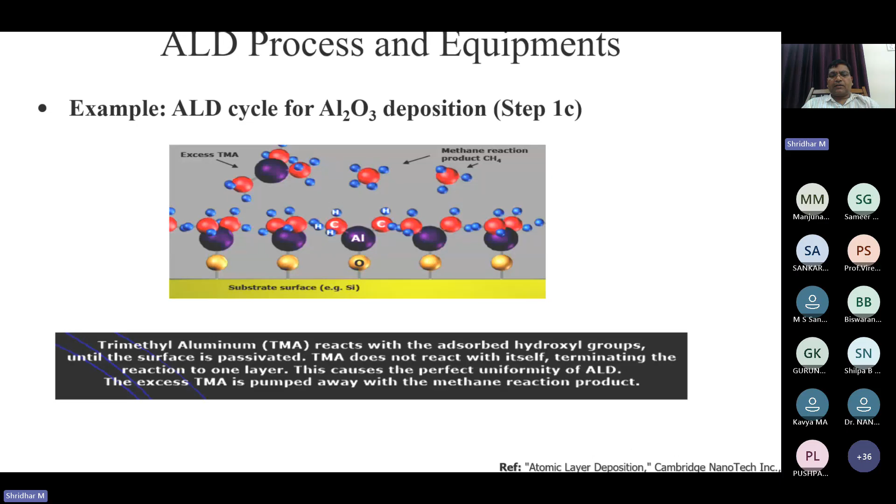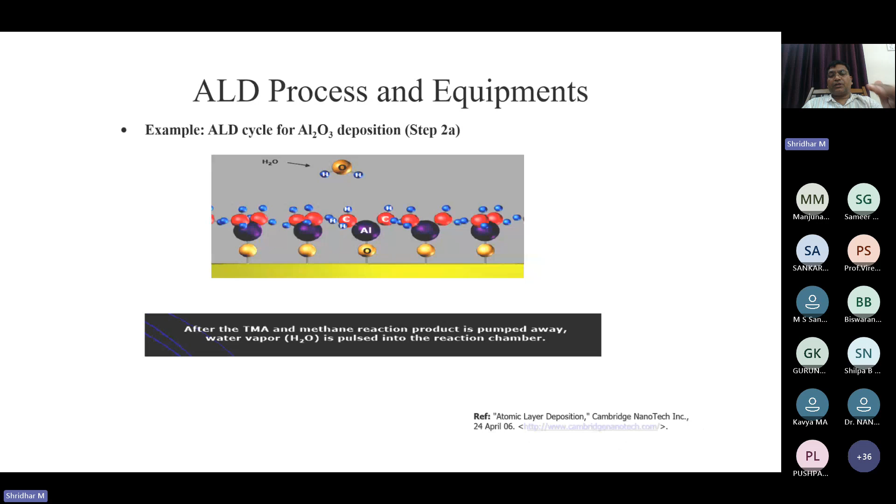This is step 1C, and now step 2A. You can see the deposition is continuous. If you want to have two layers, that can also be done. But whenever we have silicon, only a single layer of Al2O3 is required to have the best devices in our hand.

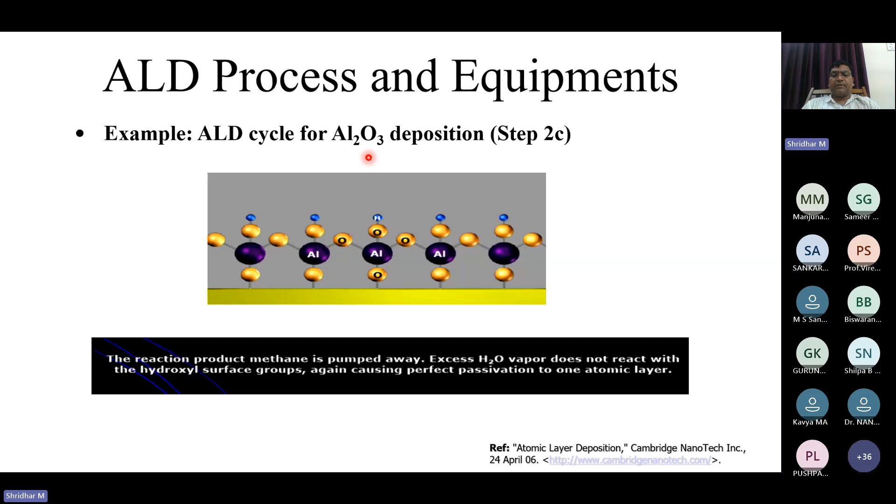So now they deposited a tri layer, a single layer, dual layer, and tri layer, all with different time durations, different types of processes. After 3 cycles, you repeat the cycles and you will have layers. For depositing one layer, it takes somewhere around 1 day for a uniform layer. How do you measure this? Then those things, dynamic XPS is possible.

Whenever you have aluminum deposition on the substrate, XPS will tell how many layers are deposited. Dynamic XPS, I think in India we only have it at IISc. Apart from that, we have dynamic XPS in Hong Kong or Thailand. During the synthesis or fabrication process itself, you can do this analysis.

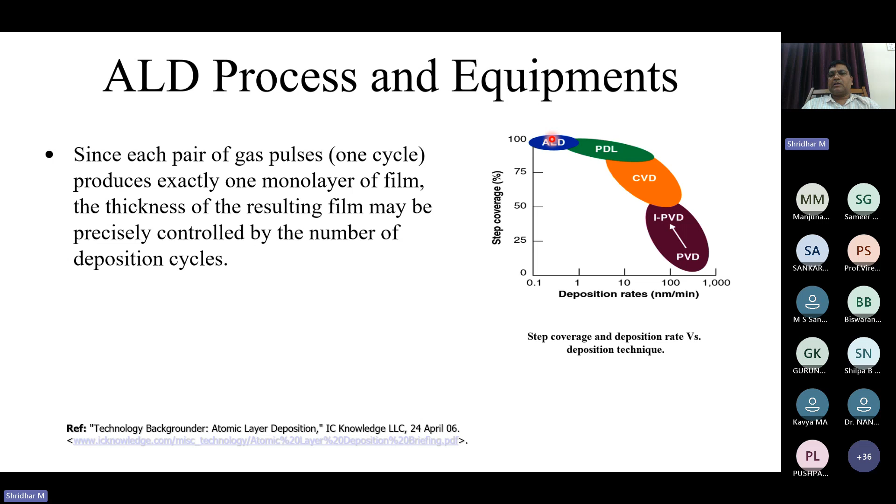ALD process and equipment. We have different types of methods, but looking at deposition rates and step coverage, the best one is ALD, atomic layer deposition. But for industrial application, having this instrument well maintained is important, or else a simple error will lead to disaster. ALD process equipment includes closed system chambers, open system chambers, semi-closed chambers, and semi-open system chambers, based on four main types of reactors. I will not go into detail.

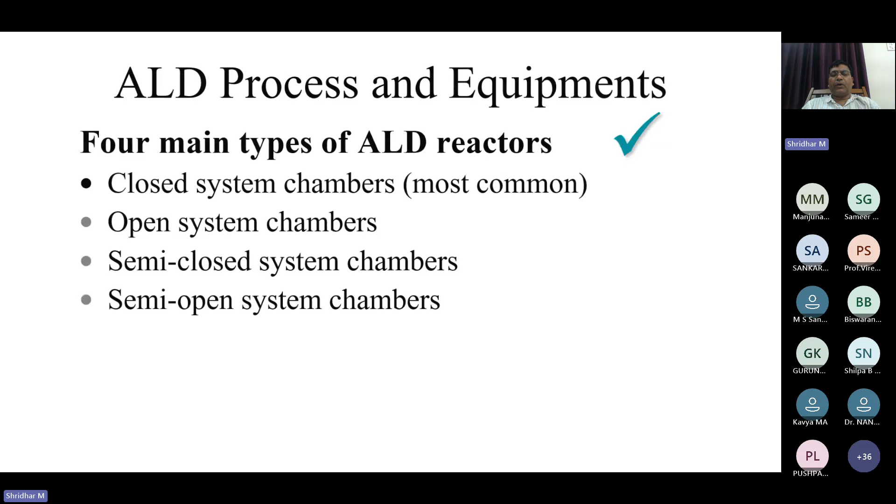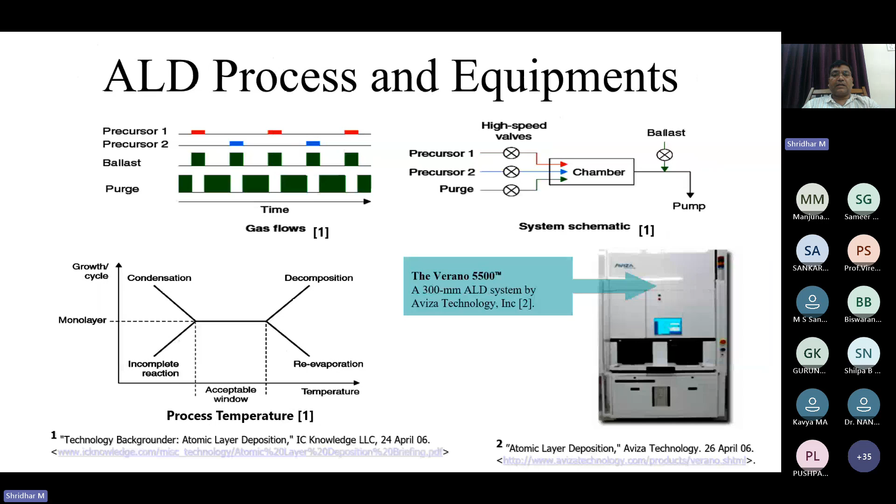ALD process equipment, I will not go into detail. Semi DRAM, memory chips, yeah. This can be used to prepare semiconductor memory chips, copper interconnect barriers, and deposition of porous structures. You can see this is the deposition.

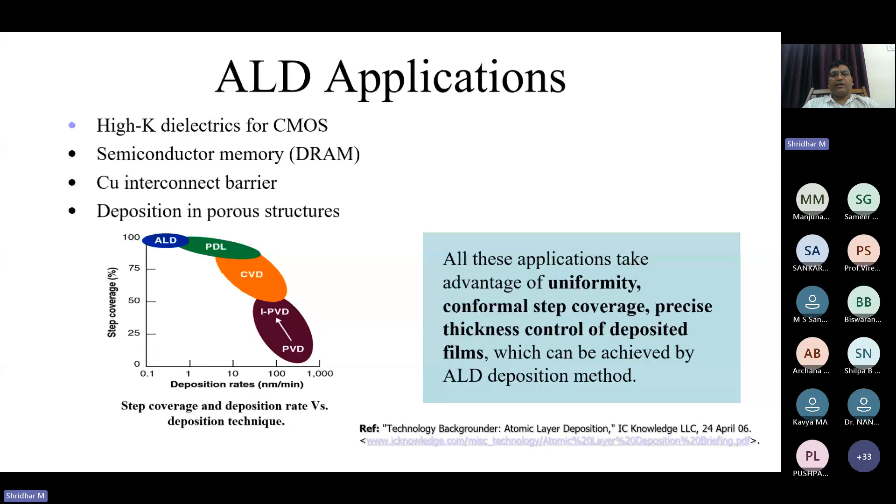Gate, silicon oxide, silicon substrates - these are all Al2O3, HfO2, zirconium oxide. All these can be deposited, and for that we have different precursors. Again, ALD is the best method for this.

This ALD also has advantages and disadvantages. Advantages: we can precisely control the thickness and get material without any defects. Disadvantages: deposition rate is slower than CVD, as I told you - for single layer deposition of Al2O3, I need one day on a silicon chip. The number of different materials that can be deposited is fair compared to molecular beam epitaxy.

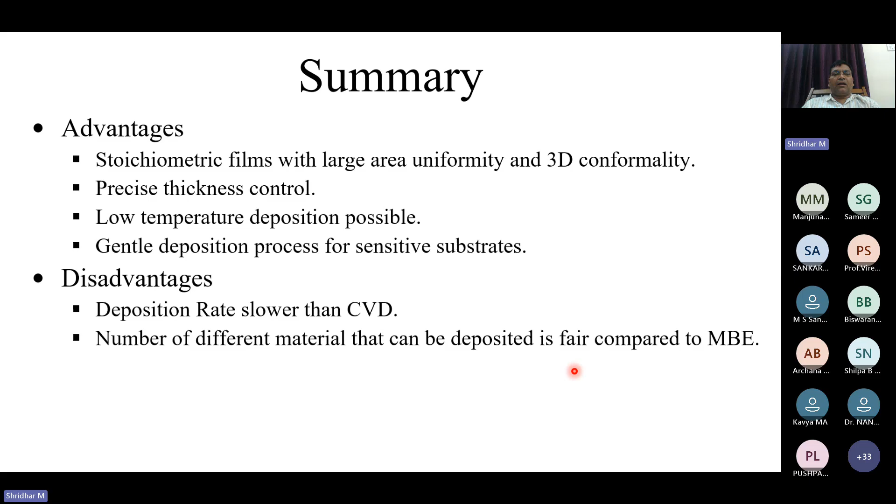So, in summary, these are the advantages and disadvantages.